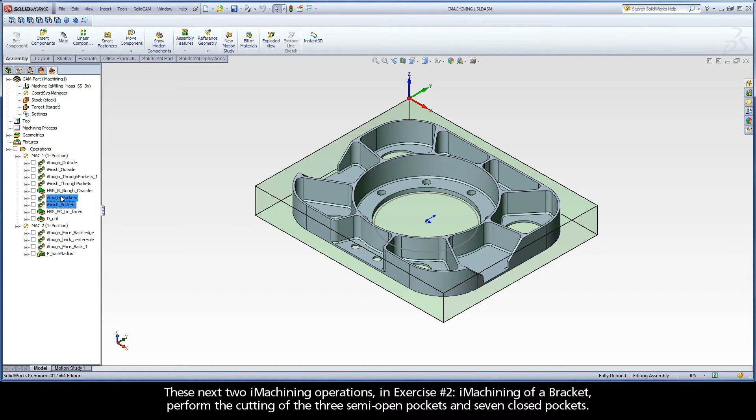These next two iMachining operations in Exercise 2, iMachining of a bracket, perform the cutting of the 3 semi-open pockets and 7 closed pockets. First, let's take a look at the iRough pockets operation. Double-click on the operation in the CAM tree to open the iMachining operation dialog.

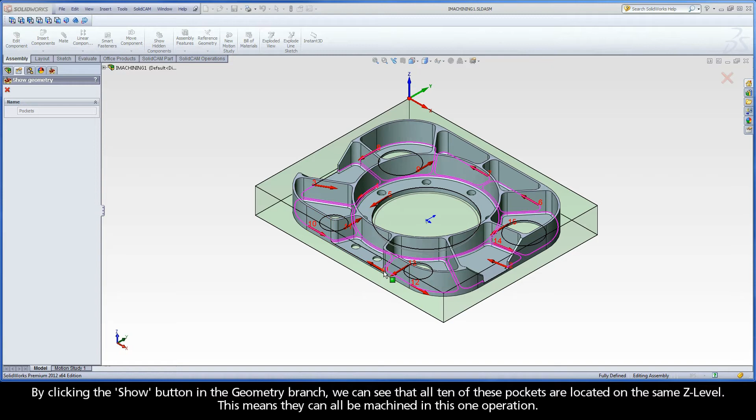By clicking the Show button in the Geometry branch, we can see that all 10 of these pockets are located on the same Z level. This means they can all be machined in this one operation. The first 3 chains have edges marked as open and wall, allowing the tool to enter from those edges. 5 of the closed chains use the through pockets as entry chains.

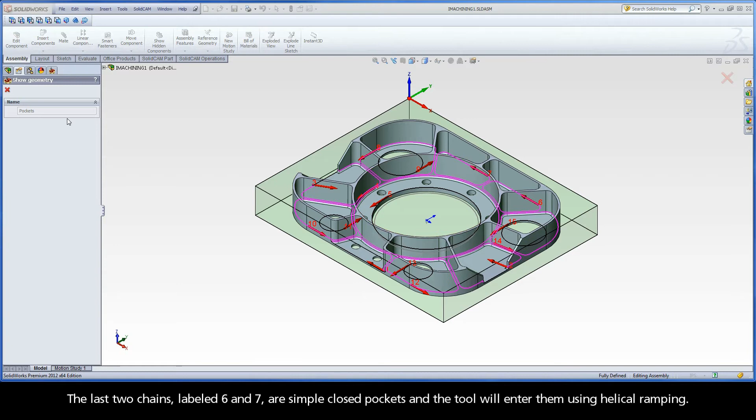The last 2 chains labeled 6 and 7 are simple closed pockets, and the tool will enter them using helical ramping. Exit the Show Geometry dialog by clicking Cancel. We will be using a 3/8 inch diameter bullnose mill with a corner radius of 1/16 inch, as shown on the tool page of the iMachining operation dialog.

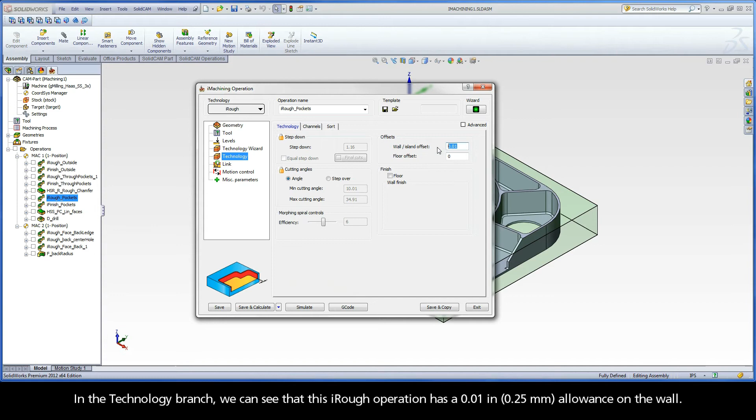The levels have been picked with no additional delta depth. We will use the default Technology Wizard settings with a machining level aggressiveness of 6. In the Technology branch, we can see that this iRough operation has a 10 thou allowance on the wall. Let's click Simulate and take a look at our toolpath at work.

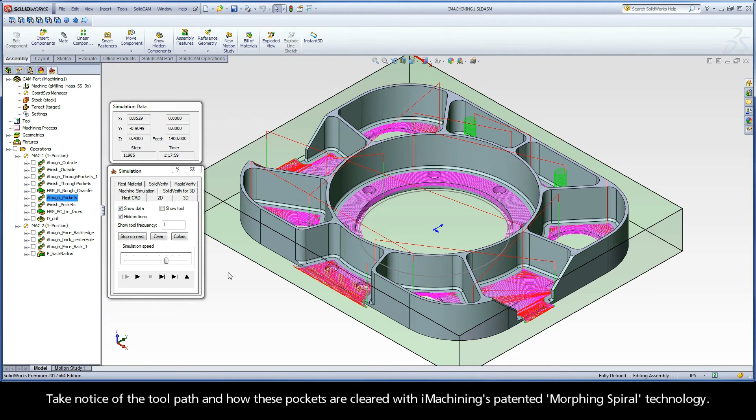In Host CAD, press play. We can see the tool approaches the first 3 pockets from the outside. The tool enters the remaining pockets either by entry holes or helical ramping. Take notice of the toolpath and how these pockets are cleared with iMachining's patented morphing spiral technology.

Now, let's view the simulation using SolidVerify. Press play to view the cutting tool in 3D moving through the solid stock material.

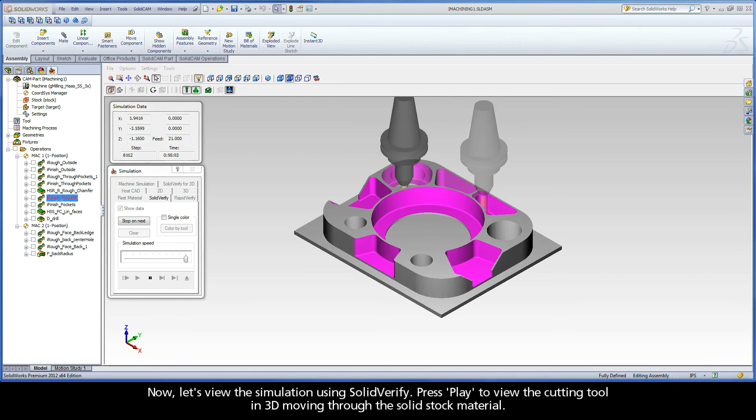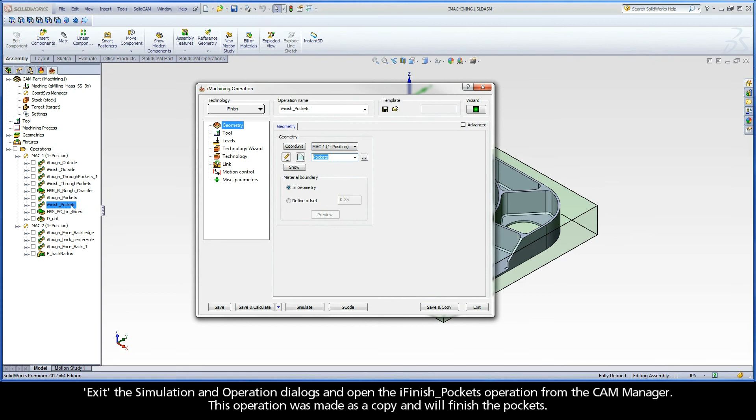Exit the simulation and operation dialogs and open the iFinish pockets operation from the CAM manager. This operation was made as a copy and will finish the pockets. iFinish is listed for technology. The copy geometry selections, tool, and milling levels are all used from the previous iRough operation.

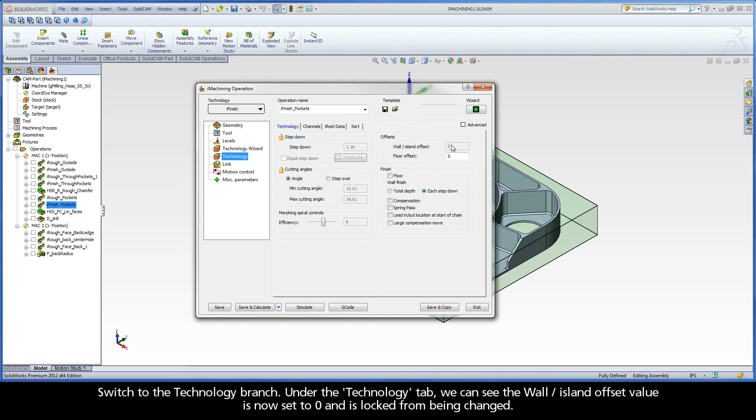We will use the default Technology Wizard settings with a machining level aggressiveness of 6. Switch to the Technology branch. Under the Technology tab, we can see the wall island offset value is now set to 0 and is locked from being changed. Also, under the iRest Data tab, notice that the previous iRough pockets operation appears in the parent operation combo box, and the 3 inherited values are used for calculating rest material.

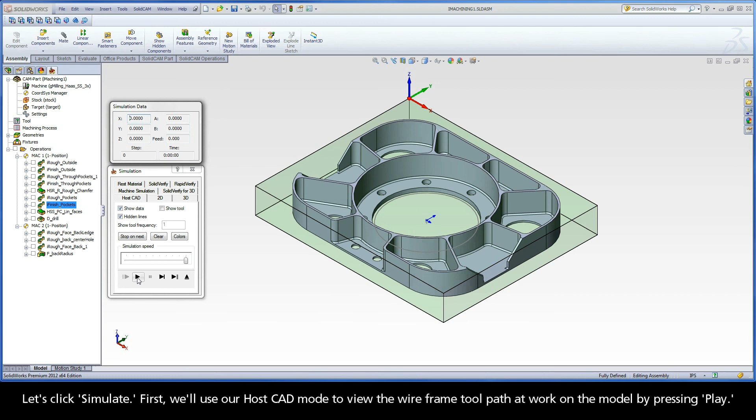Let's click Simulate. First, we'll use our HostCAD mode to view the wireframe toolpath at work on the model by pressing play. Then, we'll look at the machining of our part in Solid Verify. Using the slider, first slow the simulation speed down and then press the play button again. The finishing of each pocket is performed with a single profile pass. Let's exit the simulation control panel and then exit the iMachining operation dialog.